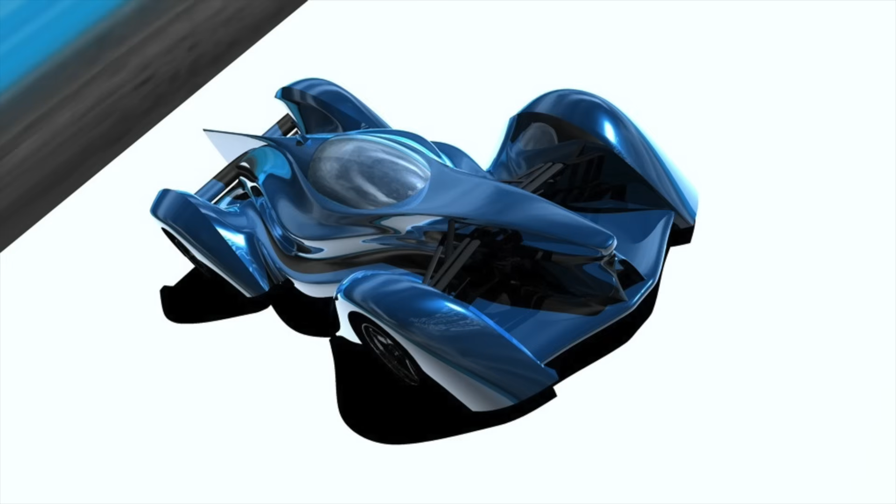Formula E could have looked very different if it had taken a different path when it first started. Instead of being a one-make championship with everybody driving the same car, originally the idea was that lots of different car designs would have taken part in the opening season, and some of those design proposals were absolutely wild. This video takes a look at some of those designs.

These are the lost cars of Formula E. Now I want to make it clear that I'm not going to be looking at some of the really wild, incredibly cool but not entirely serious proposals like these Mahindra Pininfarina concepts. While they look like a huge amount of fun, they weren't really serious design proposals for actual real race cars. They were just vague visions of the future.

What I want to look at instead are the serious proposals, which were made between 2011 and 2013, and the first of these was a lot more than just a proposal. It was a fully running car built specifically for Formula E, but before Formula E was even called that. I am of course talking about the Formulec EF01. This car, which was in part developed by Brawn GP, essentially launched the Formula E Championship.

If you want to know more about this car specifically, then we do have a video specifically for that, so go over and have a watch of that if you like. But what I want to talk about is how the Formulec ended up defining the regulations for what Formula E should have been, at least in the eyes of the FIA.

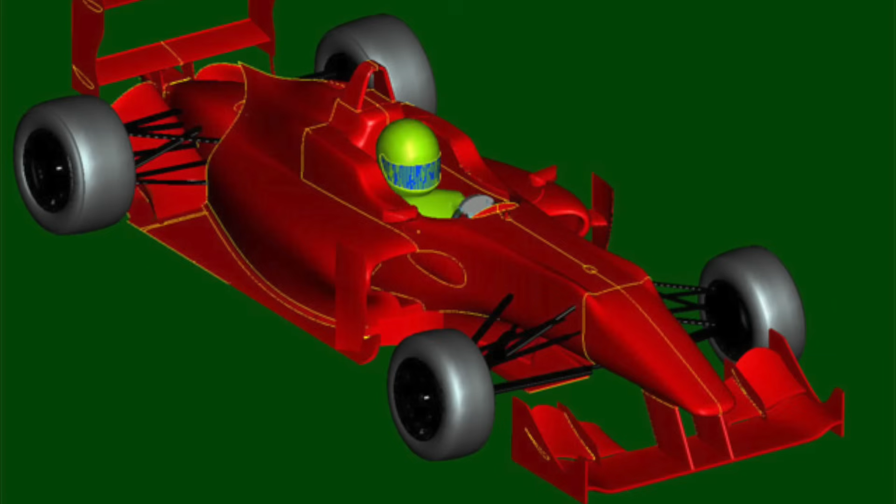Now the FIA had laid out some key objectives for Formula E and for any new cars competing in the championship. The cars would have to have roughly Formula 3 levels of performance, and they needed to be able to run at racing speeds for about 15 minutes. The minimum weight was set at 780 kilograms.

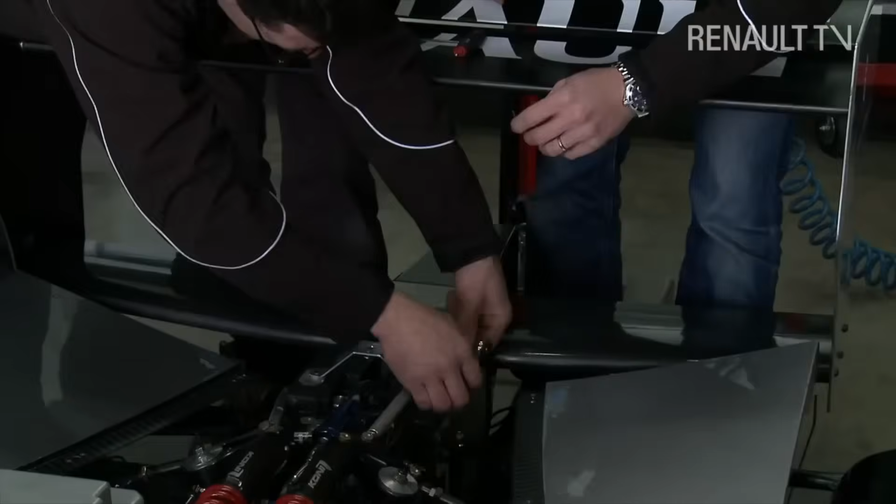At this point, no car swapping was discussed. The races were going to be much shorter than they eventually turned out to be. As I mentioned, it was not initially certain if the championship would have fully open regulations where multiple constructors could fight it out, or whether it would be a one-make series where every team has an identical chassis. However, there was a third possibility that a number of different chassis would be approved for teams to choose from, a situation not dissimilar to LMP2 when 4 chassis were approved for use by the ACO.

For this video, I'm going to concentrate on the cars which would have competed against the Formulec had the series chosen to be fully open or have that limited number of approved chassis. Notably, Alejandro Agag said around this time he didn't want Formula E to be just a clone of Formula 1. He wanted it to look different, more futuristic, and he also didn't want it to be dominated by aerodynamicists. He wanted it to be all about the electric powertrains.

So it's no surprise then that the first design proposal that Formula E received was really quite a wild one. The Fondtech E-11. This was a car masterminded by respected F1 engineer and aerodynamicist Jean-Claude Migeot and the project lead Luc Gasparini. Just how unconventional the design was really became obvious when you look at the car from the side.

The driver basically sat very high on the car, on top of the battery pack. This was essentially a double-decker chassis, with the lower chassis housing the twin motors, the battery pack, and carrying all of the suspension loads. The upper chassis would essentially only house the driver. I think this design gives the car a rather top-heavy look, and just take a look at that steering column arrangement.

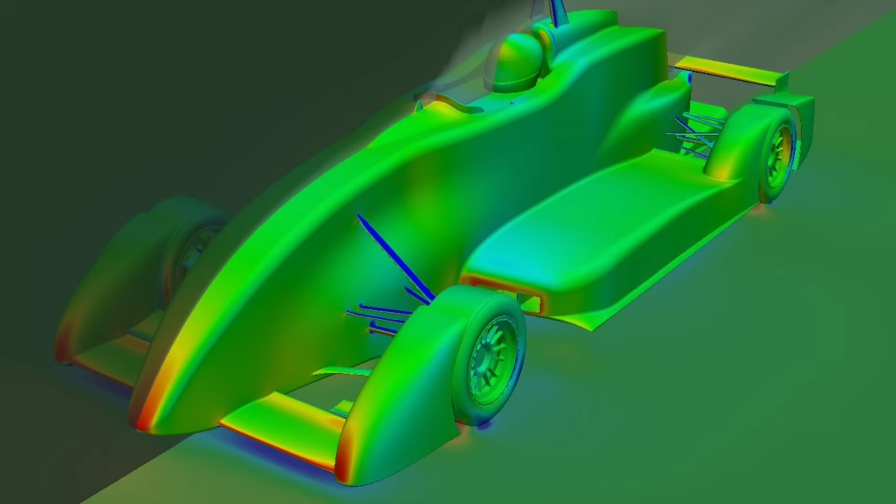Pushrod suspension featured all round. It all just looks a bit out of scale though, doesn't it, because of the height of the car. In terms of the aerodynamics, a very low drag concept was used, and it underwent significant CFD testing using Fondtech's in-house capabilities. Note the slight upsweep towards the rear of the side pod.

It's not really a ground effect car, but it's oddly similar to the March 701 from the 1970s, where Peter Wright was just beginning to explore the ground effect concept. I wonder if that's what Fondtech were trying to achieve with this side pod design.

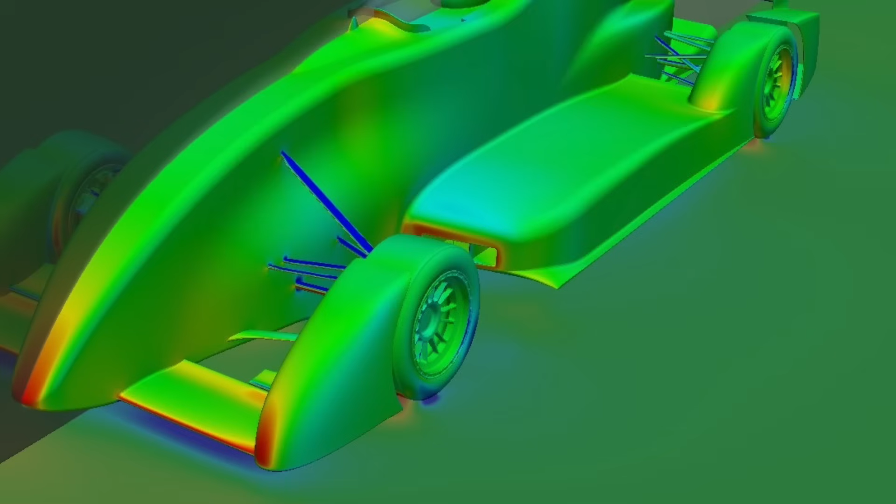Another area of drag reduction are the pods ahead of the front and rear wheels. These are actually very similar to some of the 2012 IndyCar concepts, which had been revealed about a year before this car was. However, it is important to point out that the Fondtech team do state that their design was already well advanced in 2009 before those IndyCar concepts had been seen.

This shot of the monocoque suggests that it would have been moulded together as one structure, with the two compartments, upper and lower, sitting bonded together.

Note the bracing element behind the rear bulkhead as well, to give the chassis a bit more strength due to that incredible height from that double-decker layout. With the chassis and all of the bodywork removed, it's clear to see how the driver is sat on top of a load of batteries.

Downforce generation on the car came from a small diffuser on the centerline of the car, along with a single element rear wing and a single element front wing with two small upper flaps.

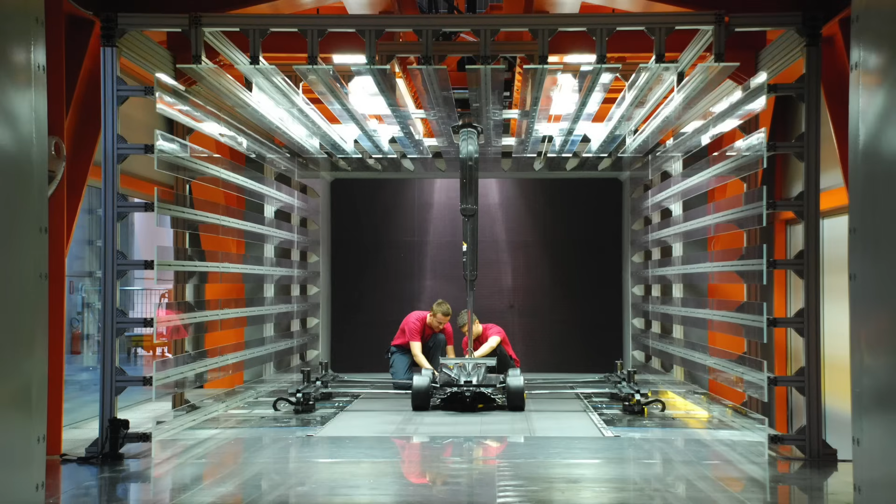Fondtech claimed to have run the car at 60% scale in their own wind tunnel, and I vaguely recall seeing some photos of that model in the tunnel, but I can't find them at all, so maybe I'm just dreaming about that. And yes, I do dream about wind tunnel models.

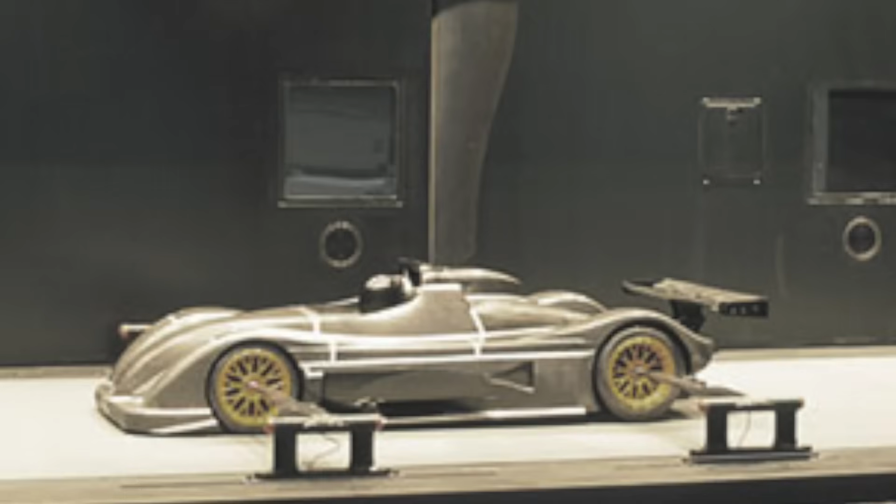Fondtech claimed that the first chassis was already under construction and the powertrain had been bench tested, and it was expected to make its first test runs on track in early 2012, but it never did.

Next up is something of a curious one, Bluebird. The Bluebird name is famous in terms of land and water speed record breaking, firstly with Malcolm Campbell and then with his son Donald, who was later killed during a water speed record attempt on Coniston Water.

Campbell Sr.'s grandson Don Wales was behind this Formula E project. Wales had already broken the UK land speed record for electric vehicles in 1997, and he raised it further in 2000, and in 2011 he tried and failed to raise it even further.

With a prominent team name and an active electric motorsport project, Bluebird seemed like a really good fit for Formula E, and Wales attempted to enter the series. The first Bluebird Formula E concept was revealed in London in 2012, curiously painted black, which is odd for a team that's always painted their cars blue, but, you know, whatever.

This was clearly nothing more than a mock-up though, and it showed a clear direction of design. Notably, it was a closed cockpit car, something that was not only seen as safer, but also significantly reduced aerodynamic drag. This first concept was called the Bluebird GTL.

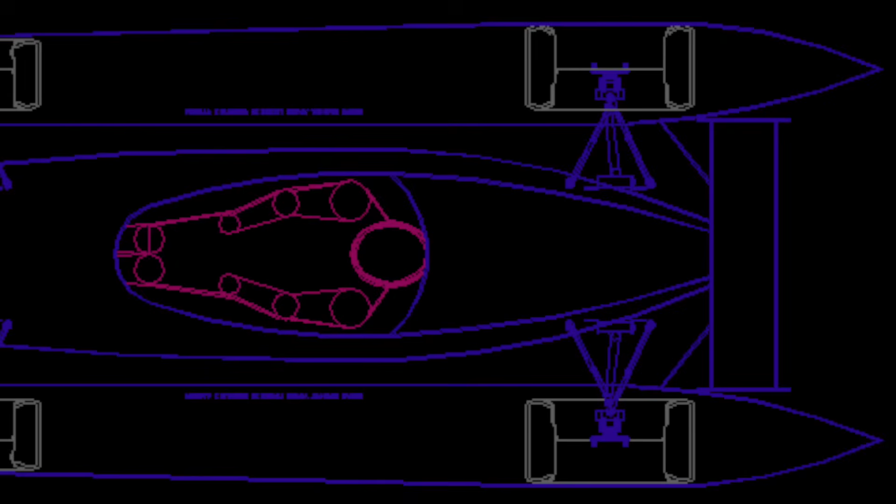Mechanical details were not really available at the time, and the team claimed that the body was just being used for wind tunnel testing at that point, and it didn't exactly grab the headlines. Some more sketches later emerged, claimed to be from Bluebird, but I'm not certain how official or serious these sketches actually were.

By 2014, it was clear that Formula E and Alejandro Agag in particular wanted to have a one-make championship, with every single team using identical Dallara-built Spark Renault 01E cars.

However, the FIA had not yet given its blessing to this approach, and there were rumours that it would insist on Formula E being a multi-chassis championship. Indeed, it was claimed that the Bluebird project was encouraged to continue working on its own car design.

A new Bluebird Formula E design concept had been created by that point, and at first glance it does look a bit like a Dallara Spark or Generation 1 Formula E car, as it seems we must call them these days. Look closer though and you'll start to notice a few significant differences.

Starting at the nose, which is lower and narrower than the Spark design, it also picks up on the front wing with a single pylon. Actually, this reminds me quite a lot of the Dome S103 Le Mans car with its nose and front impact structure shape, but these two cars are absolutely not related.

The front wheel bodywork is more angular and features an extended footplate compared to the Spark design. A small bargeboard sits ahead of the leading edge of the side pod, which itself features an additional aerodynamic element.

At the rear, the design is very different, with the bodywork sweeping in very tightly, exposing the pushrod rear suspension and leaving the rear wheels housed in external pods. Note the shape of the rear wing and the small protrusions at the base of the end plate.

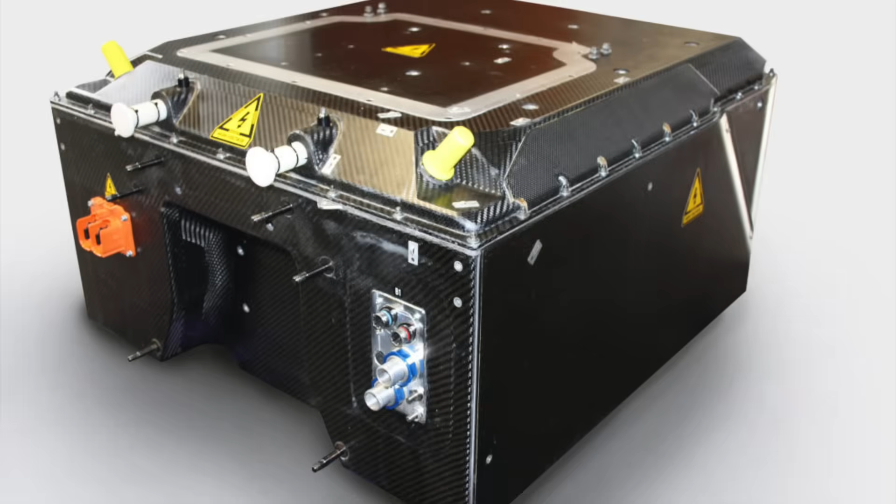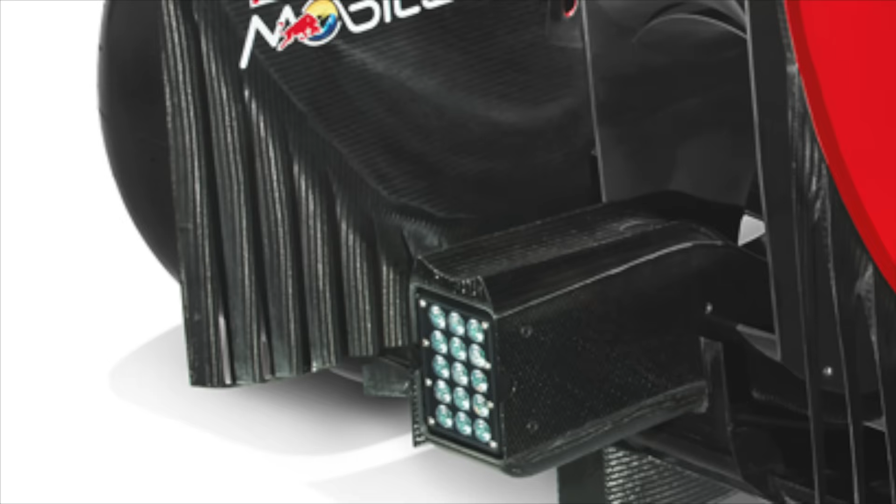The feathered base of the rear wing end plates are very similar to what was common in F1 around that time, but it seems unlikely that a Formula E car would need to have that level of aerodynamic advancement. With this in mind, looking at the design overall, I do wonder if this was much more of

the idea of the sort of thing that Bluebird would like to build if they were actually allowed into the championship, rather than a serious design study. According to the team at the time, Bluebird was in discussion with at least two teams about running its car in the opening season of Formula E, if it was allowed to get an entry.

Bluebird had also been working quite quietly on a battery hot swapping system, where the car could pit mid-race and the spent battery pack could be replaced with a fully charged one in around 15 seconds. This would have allowed for much longer races and no mid-race car swaps.

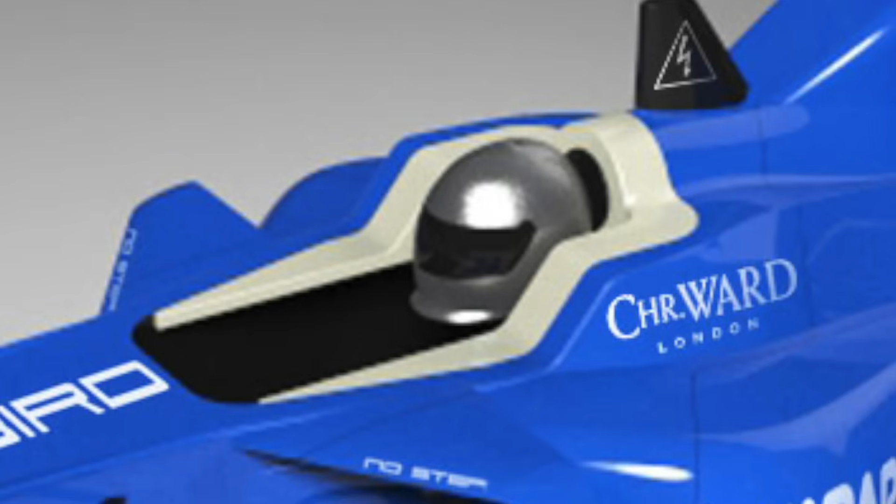Notably, the second Bluebird concept is an open cockpit design, but closed cockpits were very much of interest to a number of teams. Drayson Racing had beaten Bluebird and another competitor to the UK electric land speed record.

Paul Drayson, officially titled Baron Drayson, was a former British government minister and biotech entrepreneur. He also raced his own Aston Martin GT car and later a Lola prototype at Le Mans. That Lola was later converted into his electric record-breaking car.

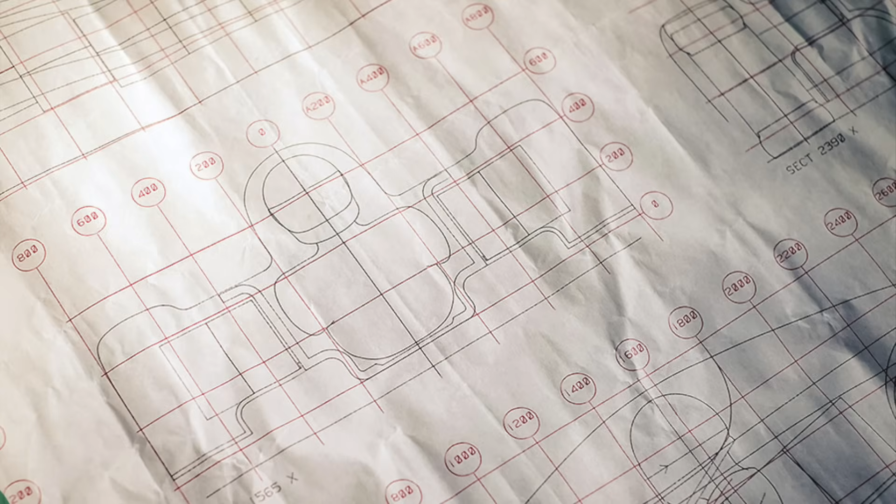It was not the first time that Lola had contemplated a design for a Formula E-like championship. Some years earlier, it was working on a similar concept in partnership with Zytek called the Zero Championship. Motorsport magazine has a really good article about it online, so I've posted a link in the description. As this project predated Formula E, it shouldn't be confused with the later Drayson Lola car concept, which still remains unseen to this day, but Lola did have a design for a Formula E car on the drawing board.

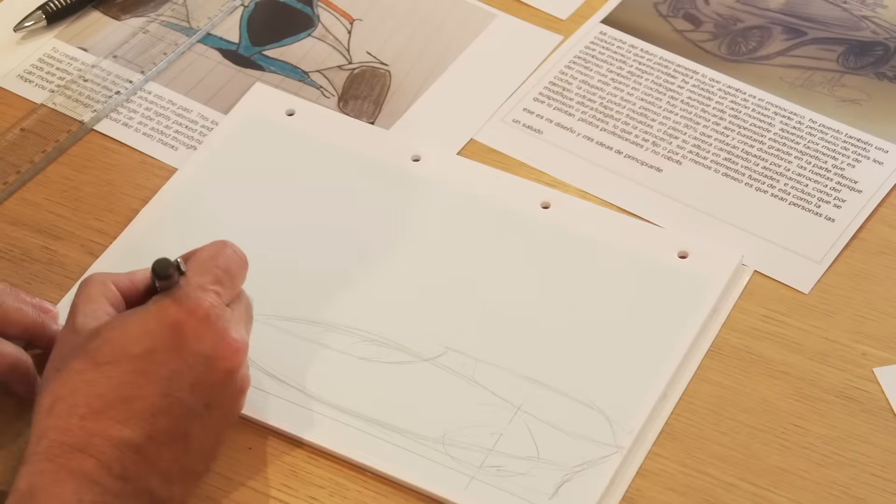That partnership between Drayson and Lola was initially expected to continue, and in January 2012 it was announced that Lola was actually developing that Formula E chassis and designs were progressing well. But just a few months later, Lola went into administration and was later bankrupt. In the meantime, former Brabham, Sauber and Arrows F1 designer Sergio Rinland had designed a concept for Drayson's Formula E entry, and that's what you're seeing here.

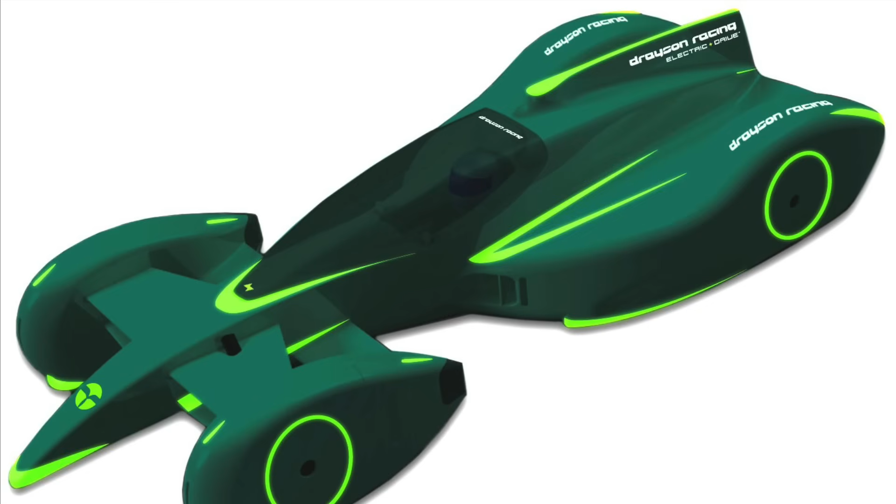The mechanical layout was not disclosed at the time, but the closed wheels could have caused some brake cooling issues, at least if conventional brakes were used. That concept was later recycled by Rinland into the Dunlop branded future race car concept, and that revealed a few more details about the concept overall.

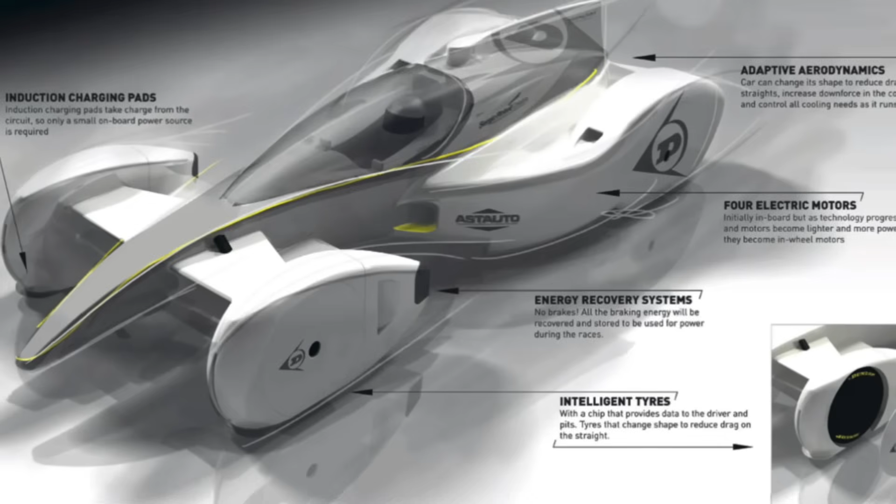The car could have been built somewhat lighter than a conventional electric racing car because it would have had smaller batteries and it would have used induction charging pads located around the racetrack to charge on the move, much quicker than having to swap and change cars or even stop and change batteries. This also meant that the car didn't have to carry such a large battery pack. It would almost be like a real-world Scalextric sort of thing, if you like, though the pads wouldn't have been all the way around the track, just in certain locations.

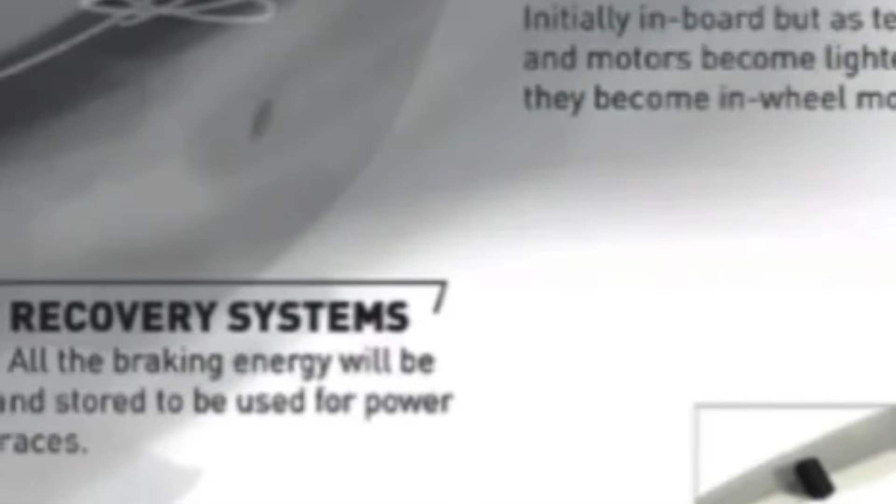Curiously, Rinland proposed not to use any conventional brakes, at least at the front of the car, and rely purely on the energy recovery capability of the electric in-wheel motors to decelerate the car. The car featured 4 in-wheel motors and torque vectoring to improve cornering. Active aerodynamics also played a role too. This was not a mere concept sketch, though. Rinland had fully designed the concept in quite a lot of detail.

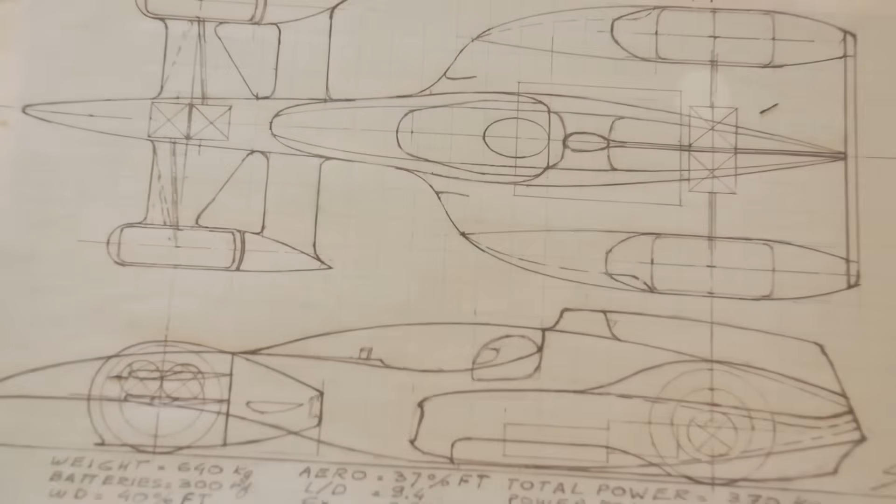Drayson Racing did actually get a Formula E entry, and they would have had to have used a Spark Dallara because by that point it was a one-make championship. Before the season had even got going though, Trulli GP had taken over that entry. Lola, on the other hand, did eventually make it to Formula E, although they too had to use a Spark Dallara. A bit of a shame for a famous car manufacturer to use another car manufacturer's chassis, but that's part of their partnership with Yamaha as the company starts to rebuild itself.

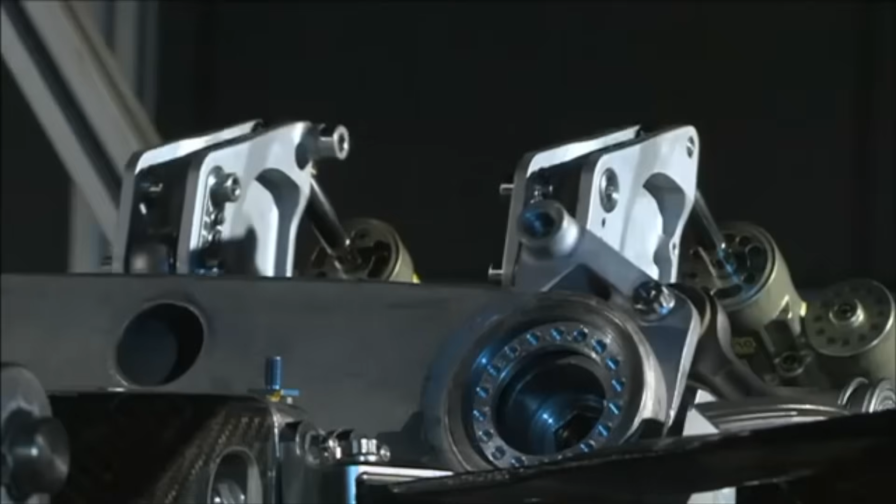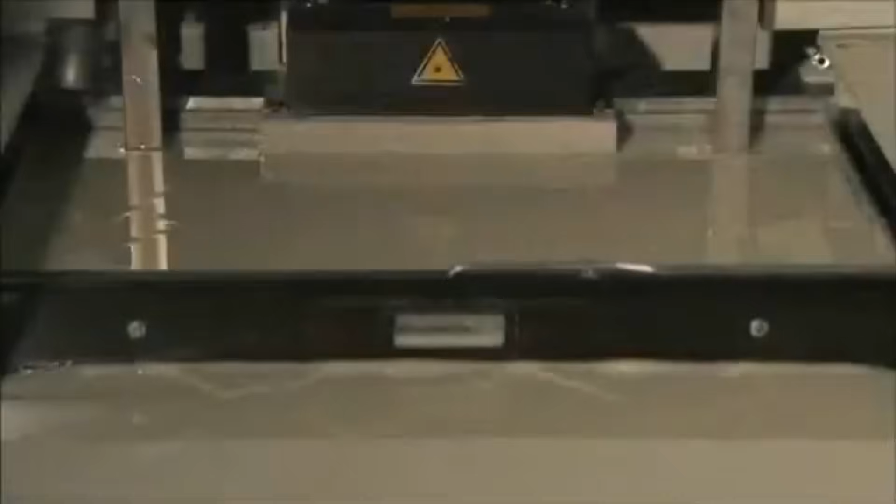The next chassis builder, well, complete car supplier actually, I want to talk about is Toyota. Toyota wanted in at the very beginning of Formula E via its TMG Motorsport consultancy in Germany, now known as Toyota Gazoo Racing Europe. Toyota had quit F1, leaving a vast and cutting-edge motorsport R&D facility. So some of the staff still working there turned their attention to a Formula E design, and Pascal Vasselon, who was the Formula 1 team technical director, was believed to have been leading a small team designing a Formula E chassis, and another team was working on the powertrain.

TMG didn't really feel it needed to demonstrate its ability to build a chassis though. After all, it had just quit Formula 1 and it had done the World Rally Championship and the Le Mans 24 Hours out of that facility, so it literally had everything it needed. What it did need to do though was demonstrate its ability to build an electric competition car, something it had never done before. So it did just that and took an old Radical chassis, fitted it with an EV powertrain and took it to the Nürburgring to break some records, which it did.

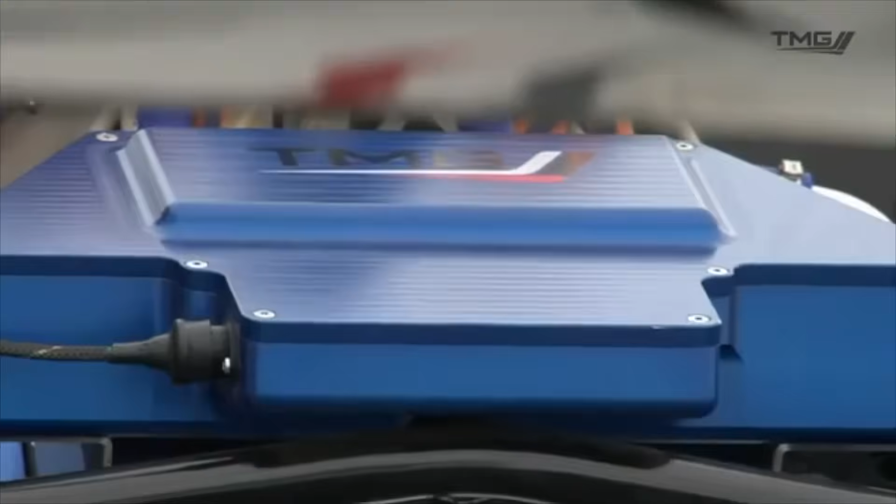Ultimately, the spectacle of the Spark Dallara fighting it out with the Lola-Drayson and the all-wheel drive double-decker Fondtech and maybe even a Toyota never happened. Formula E was a spec series and remains so to this day. I can't help but feel that the series would hold a lot more interest for fans and perhaps even manufacturers if it was allowed to have different chassis and different power units from the word go.